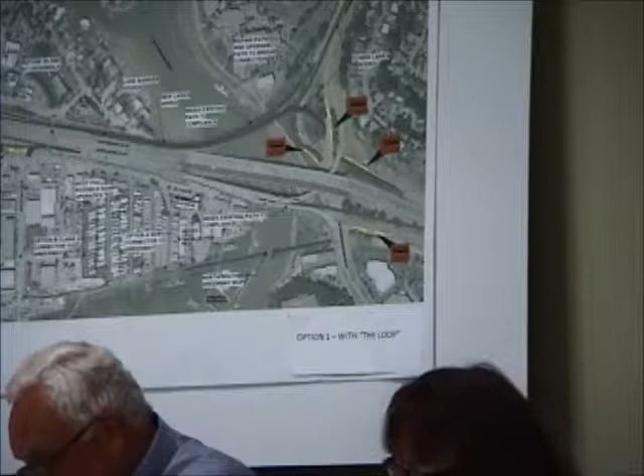Seeing none, does anyone in the public have something to add to this that they feel would be helpful? Seeing none, we're moving on.

We're moving now to agenda item 5A, presentation of newly proposed highway and local roadway improvement options from the public. I'd like to frame this meeting a little bit for all of us, because presenting a freeway project in 7 minutes is quite a daunting process, and understanding 7 of them is even more challenging.

So our job today is to identify any feasible alternatives to the current proposed project. The working group will be considering how the project relates to a problem set we all agreed on earlier in this process. That included cost, delay, design flaws, problems identified specifically in the set, environmental impacts, and whether we have to acquire other people's property in order to build the project.

Having done this, the working group will provide direction to staff to take any of the feasible alternatives, or any elements of them, that need further study, and to work with the submitters to further define the work, develop a cost analysis of any further work, how much it'll cost to engineer it, and have something understandable and presentable and feasible, then develop a budget request to take to the full TAM board and request funding for further studies.

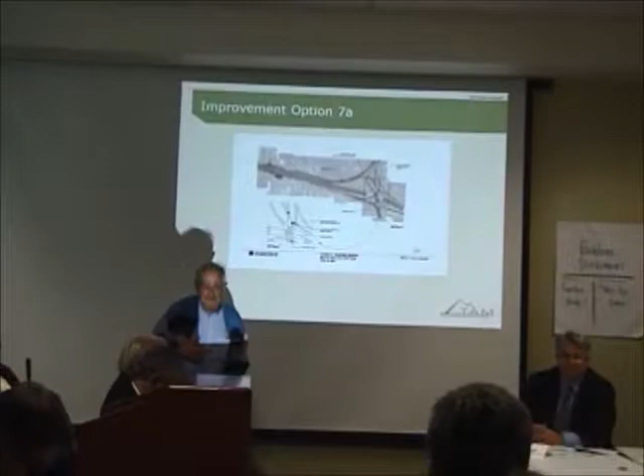Okay, so Mr. Jackowitz, thank you so much, we'll get started with you. Where is the microphone? I guess we don't have a mic. I said I was going to be grabbing the mic, it was so great, but I don't have a mic to grab. So if you could just project out this direction, that's probably a good place to stand, honestly.

My name is Thomas Jackowitz, and I've been commuting from East Bay for the last 25 years. I'm forced each time I leave Richmond Bridge onto a surface road to connect to 101. In the evening, going home, I'm again forced onto a surface road to Sir Francis Drake Boulevard, another one, to cross over to 580 and get to the Richmond Bridge. So I am the problem. I really represent the problem, and I've represented it for the last 25 years.

There shouldn't be a problem, and wouldn't be, if you followed the Caltrans recommendation. Caltrans wanted to connect 580 and 101 25 years ago in San Rafael - freeway to freeway, it makes sense. Once you do that, all the pressure on Sir Francis Drake Boulevard and the surface roads will be much lessened. It won't be resolved, but it will be lessened. Anything before that is really just a patching job, in my opinion.

That is my proposal: direct your attention to a 580-101 interconnection in San Rafael. That's number one. I'm requesting, as an individual, that Caltrans produce all those plans they had 25 years ago. They were forced to bury it for political reasons, no other. Get this into the program, because if you don't do it today, you'll be forced to do it maybe 25 years from now. You can't avoid it - the geography of that location begs for the connection. That's my proposal, number one.

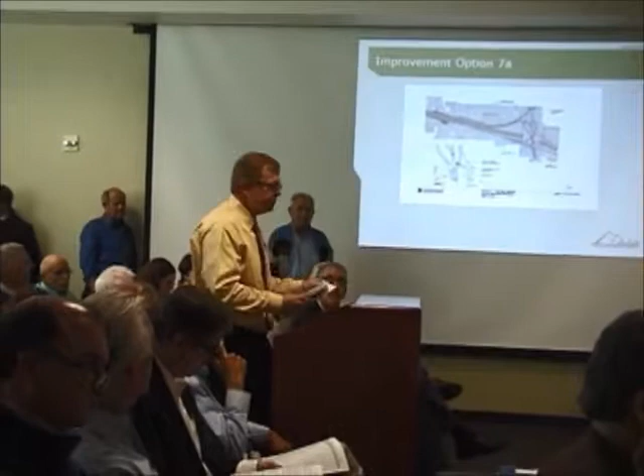Thank you, working group members. Bill Whitney, I'm the project manager for the Greenbrae Corridor Improvement Project. I'd like to tell you a little about the process we've gone through to provide an initial assessment of the options. TAM staff, for your direction, has looked at all these options and prepared an initial assessment. We worked with our technical team of traffic engineers, civil engineers, and highway engineers to further refine this initial assessment. Then we had a meeting with Caltrans, a well-attended workshop, where we went through the options and further refined our initial assessment.

I'd like to say that when you propose to modify something, just like your house, if you're going to build or remodel, you have to bring it up to current standards. So that's what we're faced with all of these options, as well as the option that we proposed - when you're improving it, you have to bring it to current modern standards.

I'd like to address a couple of the options Mr. Jackowitz presented. The first one was his freeway-to-freeway connector in San Rafael. We have looked at that in the past. The working group actually had a presentation on one of the movements of that freeway-to-freeway interchange, and we felt it had benefit - it does provide a direct freeway-to-freeway connector.

What we found with our previous investigation is that westbound 580, coming from the Richmond Bridge going southbound on Highway 101, we learned there was a number of traffic issues that caused congestion and potential backup of Highway 101 in the southbound direction in the morning. We did look at the other movement, the northbound 101 to eastbound movement, and we feel there are benefits to that.

A couple of challenges we noted with that proposal is that it creates two merges on the Sir Francis Drake ramp, followed by a weave between the Sir Francis Drake on-ramp and Fifer, and then a merge onto the highway in a very short distance. I mentioned that as a challenge - that is something that would absolutely need to be evaluated further.

With that, I'd like to open it to questions that you may have. Okay, so questions for either Mr. Jackowitz or staff on this proposal. Go ahead.

On the northbound 101 to eastbound 580 concept, does that also impact the public right-of-way and impact private properties? We think it does, yes. Could you describe where that route would be located? Well, as you're going up and over Cal Park Hill on 101 and coming down, the businesses to your right, to the east of Highway 101 - there's a number of businesses in that loop, and they would be affected by the development of such a proposal.

I noticed that in the supplemental information we got this afternoon, it states that the US 101 southbound connector has previously been investigated and discussed by the working group. I don't believe it's been investigated by the working group, and any discussion was cursory at best. So I just wanted to clarify that, and if this turns out to be something the working group wants to pursue, I want the record to state that we have not previously discussed that.

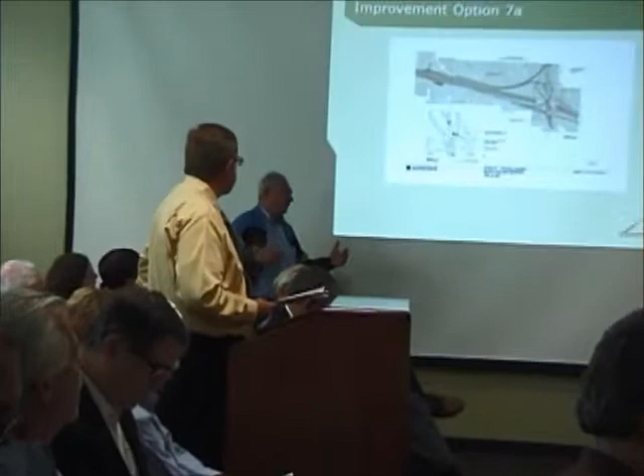So maybe it'd be better to think about this particular structure in the context of the Marin Deserves Better structure, which gives a different context and a different solution, and just move on from this particular option. That should belong in their proposal, I think, yes. I just want to emphasize the need for the surface-to-surface crossing.

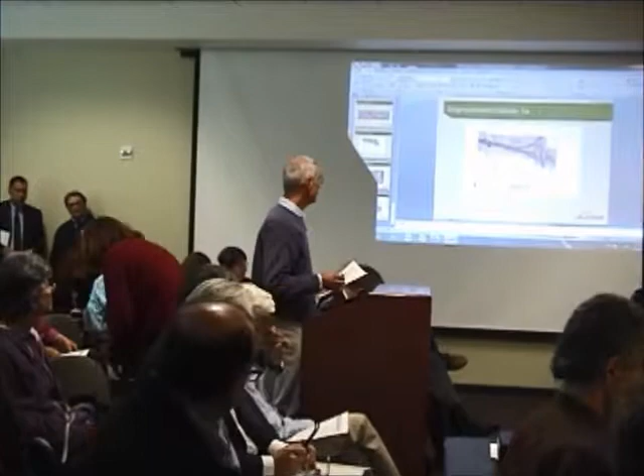The first proposal is a 3-way undercrossing at Fifer Avenue interchange instead of at Wornum. Now, how would you do that?

Well, most of you probably know that Wornum undercrossing is actually on a hill, about 30 feet high. So basically what we do is instead of dropping down here, we just extend that hill by keeping it freeway elevated until it gets across over here, and then let it drop down.

Now we can extend Fifer. This is Fifer, by the way. Lucky's is over here. But we can extend Fifer and just under here so we can access these ramps. We can access Redwood Highway, all this area over here.

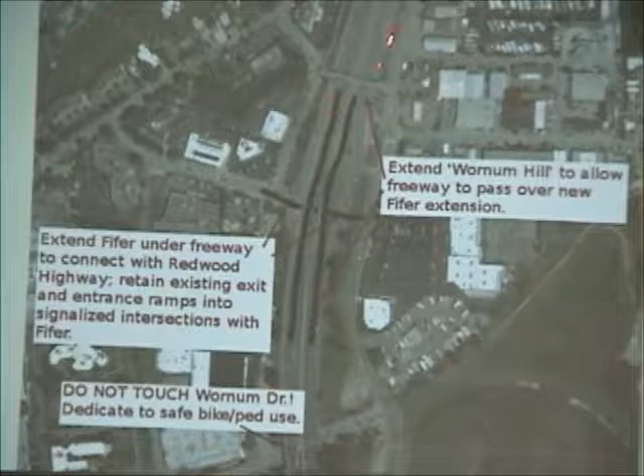Now, exactly how the traffic gets from up here down here, and so on, this proposal does not address. You will hear more about that in my second proposal, so I'm not going to address that right now. There are a couple of problems here, though, that I do want to indicate.

This exit coming off down to industrial, the so-called industrial exit, if it hits Fifer here, and then you want to go over to Redwood right here, that's a very short area, and probably would have trouble stacking traffic.

So lots of possibilities to address that, and one of those is Fifer comes up here, takes a left, goes up to the present exit where it intersects with Redwood Highway. You can stack up traffic there. Another problem with this is that bringing this exit down here to intersect with Fifer, you've got Nellen over here, about an arm's length away.

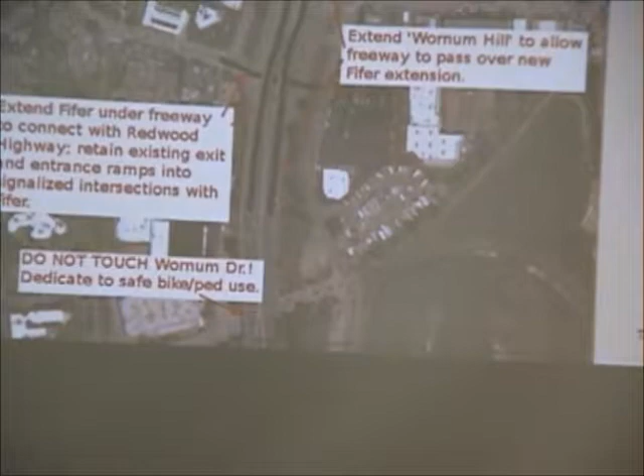That's a mess. A possibility of dealing with that is to stop this off-ramp, bring it over here to Nellen, and that's where you access Fifer from there. Now, why would you want to do this? I see there are three constituencies. The first is a regional constituency—Southern Marin, Central Marin. I can make a case that it's actually much broader, even worldwide. But what I really want to do is save Wornum Drive.

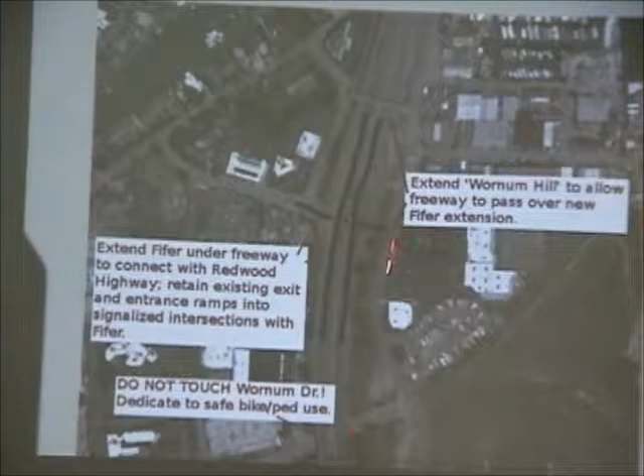The second constituency I see is the whole community of Larkspur, Corte Madera, some other unincorporated areas, the boardwalk, and so on. These people really have a lot of trouble with the congestion down here on Bella Vista and Redwood. What this undercrossing would do is take all these offices and Redwood High School and all these people who want to go north—they just go underneath here, take a left, and they're gone. Instead of going down Bella Vista, taking a left on Wornum, taking a left on Redwood, coming back up here—what I call the Wornum Dipsy Doodle.

Same thing if people want to go the other way. You've got the same kind of problem if you're over here and want to go south. You've got to go all the way down here and come back here and then on here, instead of just coming here, going over here, and boom. It seems to be a fairly straightforward kind of thing.

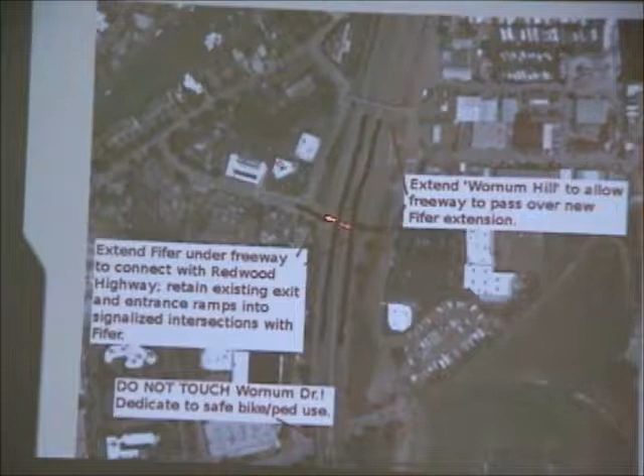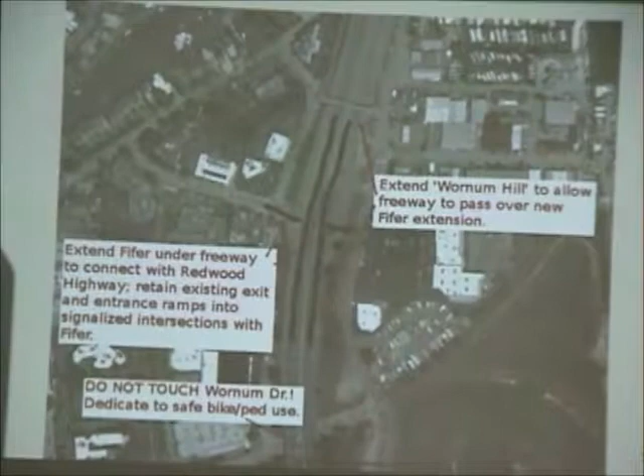And the third constituency is the immediate Fifer industrial neighborhood. It's primarily commercial now—there are some residences on the creek, the boardwalk, the mobile homes, and possibly in the future there may be other residences. But primarily commercial. Now, with this, you're right on the freeway, you've got immediate access to it, and you get to the other side, even to services that you want to get to on the other side, right there.

And Mr. Price, you're over 10 minutes. Can you wrap up soon? I am over 10 minutes. He's only got 5 minutes. Oh, I'm sorry, I can't count—this is down counting. Could you excuse me? Okay, that's good. No, that's okay.

Thank you. And one of those other little things—you put a bus pad here, you know, you get one to the other, it's at grade. It's a nice little feature.

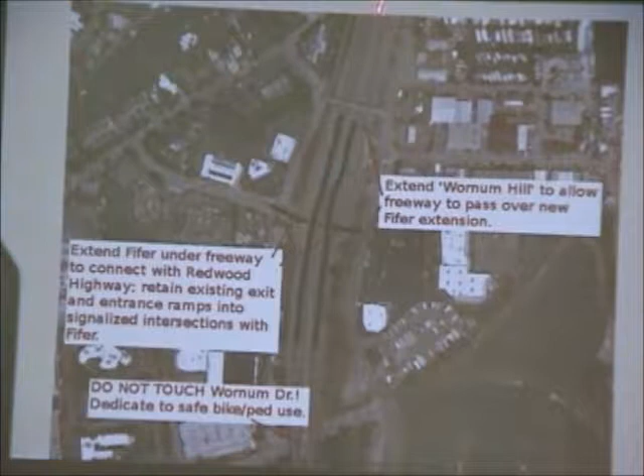As far as noise is concerned, unless you want to repeal the laws of physics, there won't be more noise. It may change a little bit about where it goes, but overall it seems to be somewhat imperceptible. Anytime you do any freeway work in a developed place like this, you've got to put up sound walls. That's it. This proposal also has another option: keep that freeway elevated until it gets up to the creek. Now I can see the eyes rolling and the noise is crazy.

Well, we're going to have to do that sometime in the next 20 years anyway, or we're going to be underwater. But it also changes the whole dynamic of that whole area, because people are going to go up there and look through, and see all the places you can angle across here or there. You don't have to have just one way to do that. People say, oh, there's this big hulking structure.

Well, let me ask you a question. When you first came into this room, you noticed there's a wall there, you probably recognized there's a door there. But I bet not one of you knew there were fluorescent lights in that pattern right there. So that's the same thing that would happen here.

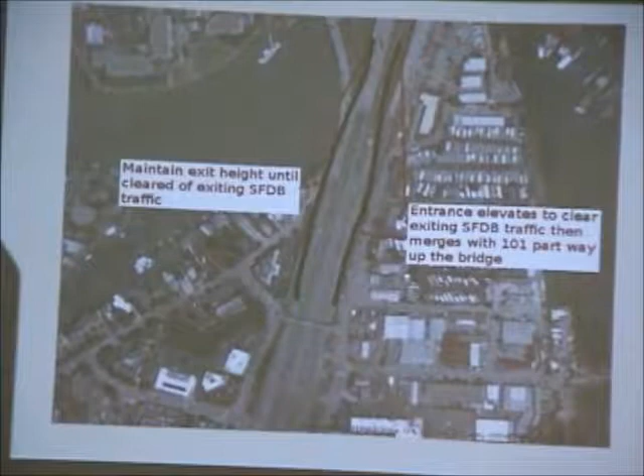Consider downtown San Rafael, what it would be like without that freeway elevated. If you're down there on 4th Street, take a stroll underneath that freeway, stop and look up. You will see sky. How many of you knew that? If you did, it's probably because of that accident a few months ago.

Okay, a second proposal. Independently, it's just another way of getting from the Redwood Highway area to merge with 101, and from 101 back on Fifer. Basically, you get on, elevate, you fly over these guys and merge here.

I was going to say something about how difficult all this is going to be. I sincerely recognize just how difficult this is all going to be—physically, financially, and politically—but all that good. Thank you.

I can vouch for Mr. Price. Every time I'm down in the corridor, I see him and Nancy riding through, so they do know the corridor very well. Like all of our proposals today, we have elements that absolutely have beneficial features.

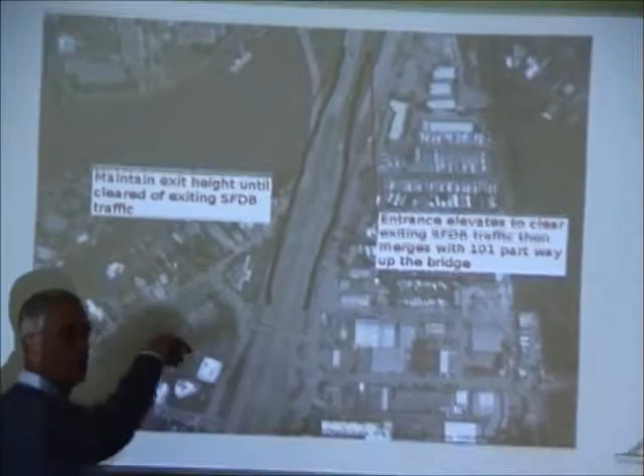Can we ask him to just go to his illustration and point out the flyover? That'd really be helpful. It's a braided ramp—well, no, there's only one. Point to it, sir. Okay, going northbound, here, you go up and over these guys that are trying to get off over here, and then you come back in and merge up there with the freeway.

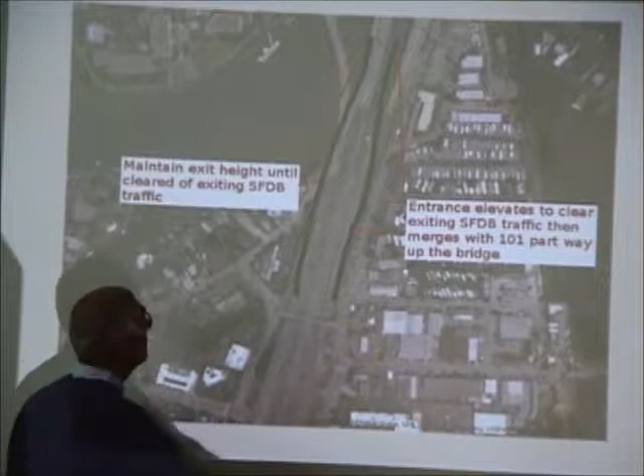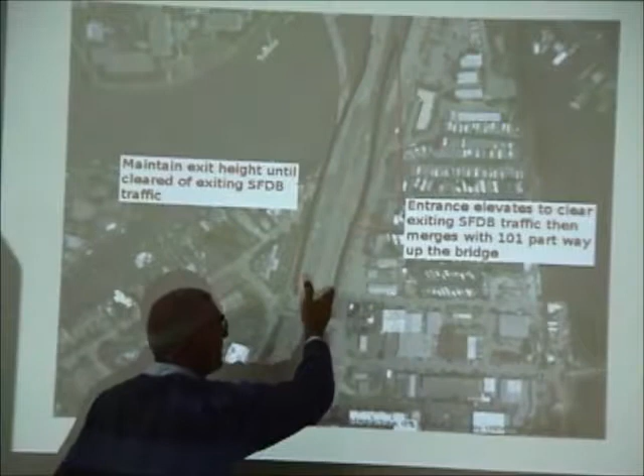Coming southbound, you come down here, partway down that bridge, you stay at that level, so you cross over here, and then drop down, and you come back right down to where you are now. So these exiting folks do not interact with any of these people coming down through here. And same here, these folks going up there do not interact with the people trying to get off going that way, because they're all above it.

Above it, and that's all on an elevated structure. Well, yes, it elevates. Okay, that's correct.

Katie? I was trying to clarify if it would reduce, have an impact, or relieve congestion on east and west Sir Francis Drake going underneath the freeway, and I'm still not clear if that northbound traffic that now gets on going north at Industrial and has to drop down and cross the freeway, is that going to continue, or would they be jumping onto the freeway?

That's what this does. It takes that traffic that now has to stop at Francis Drake and then go back on. It takes that traffic up here, goes up and over this freeway. So they're coming and getting on at Pfeiffer on the east side of the freeway? Somewhere along here. I'm not sure exactly where, but somewhere in here.

And then, with regards to the height of the structure, and not to be disrespectful, but given the community's real pushback and outcry not to have the elevated structure that was part of the build project, how does what you're proposing compare height-wise and location-wise to that structure? The height of these things, I would estimate to be about the same height as this.

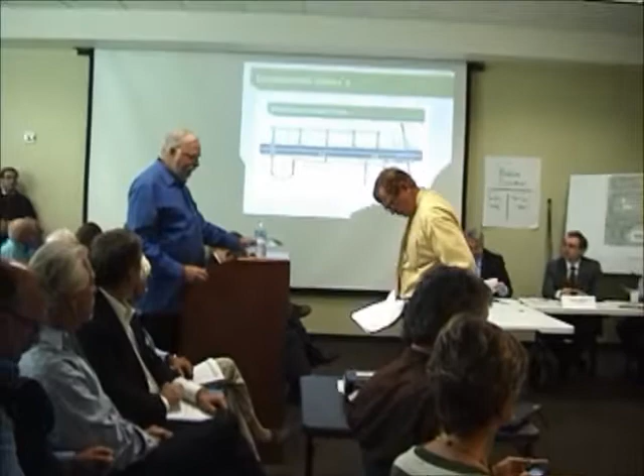Okay, what I'm about to describe here is not complicated, but it is a different approach to typical transportation problem solving. The Greenbrae project is a stunning example of how the standard transportation engineering approach didn't work. So here's another way of looking at things. Rather than throwing money at an expensive structural solution, why not take a surgical approach and try to understand exactly what the problem is first before spending big money?

Then a least cost solution can be created. Let's start with what is the problem? Robert Harrison identified two of the big problems in his proposal: the southbound weaving causing congestion near Pfeiffer, and northbound congestion around the Industrial Way on-ramp.

5 of the 7 proposals here today call for a new road or structure to solve the Pfeiffer problem. 2 call for a new bridge for northbound 101 on-ramp traffic. 1 calls for a new bridge for local Sir Francis Drake traffic, and another calls for modifications to the existing ramp. My approach is different in that it starts by questioning the assumptions.

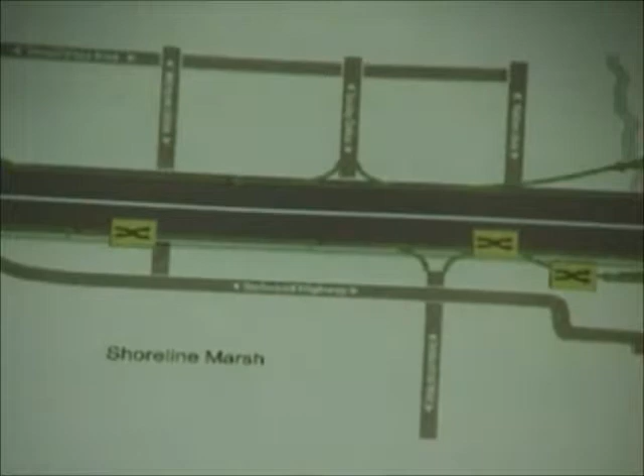So the question is, what would actually happen to traffic? Would the world as we know it come to an end, or would people adjust? It's an open question, at least in my mind.

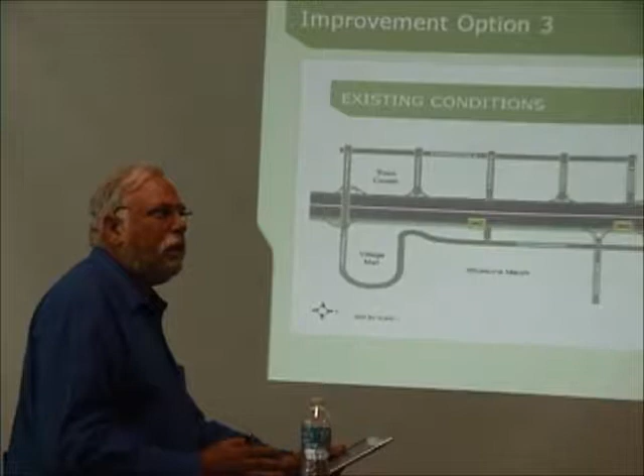Because modeling is apparently not trusted, why not try out a closure for a test period, say 2-3 months? With enough advanced publicity and public information, drivers would adapt to the new realities. We get messages about Doyle Drive, the Presidio Parkway closures.

That kind of thing could be done. We think drivers would adapt to the new realities. We would then see what happens. By making measurements before and after, something useful should be learned that will allow a decision to be made on the basis of real-world experience and not theory or hypothesis.

So the first assumption being tested is that a ramp that has been in existence for roughly a half century or so is vital to the functioning of a commercial district. We know that such a ramp could not be built today due to design guidelines that Caltrans has developed through painful experience over that half century.

How would traffic flow be designed if this were a new development? What exists here today could never be built today. And so maybe there's something we can learn from that.

Another assumption being tested is that another ramp, this on-ramp here at Industrial Drive, Industrial Way, that is vital to the functioning of the East Side Commercial District.

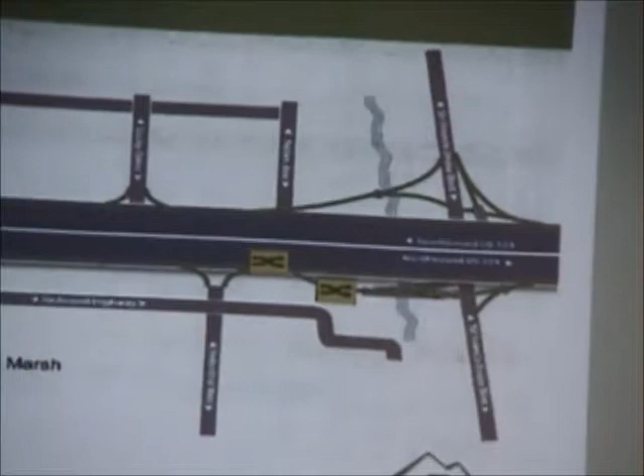We know that the traffic on Sir Francis Drake at northbound 101 — that's over here, wait, no, it's right here — that this traffic is severely impeded because of this traffic that crosses to go on to 101 North.

If that traffic didn't exist, the Sir Francis Drake traffic problems might disappear. So the other part of the test is to temporarily close the on-ramp at Industrial Way. Eliminating the cross traffic would increase the capacity for through traffic on Sir Francis Drake and might seriously improve the level of service there.

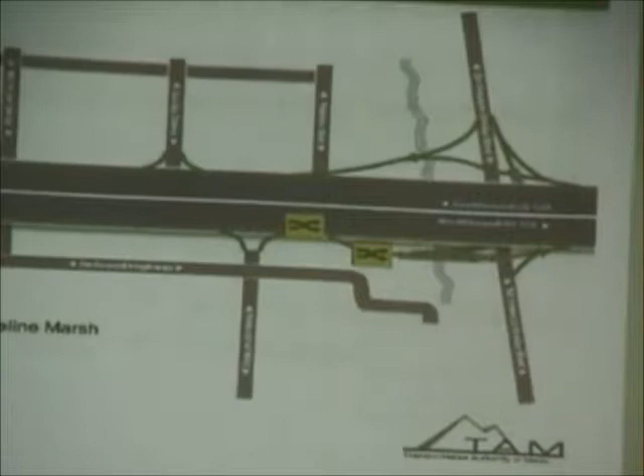The staff report raises fears of liability unless everything is done like it always is, with modeling and studies and consultants galore. The rest of the world is moving in another, more experimental direction.

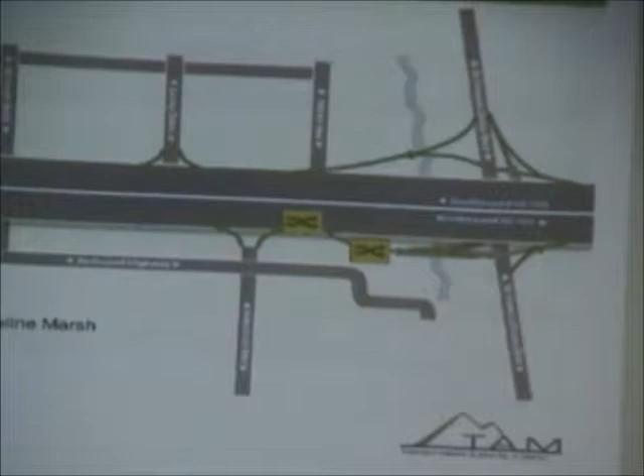Both New York City and San Francisco have conducted tests of innovative new ideas. My understanding is that they just did it to see what would happen if they didn't go through those procedures. So that's my first proposal.

What I'm going to say now does not relate to this slide. A second set of proposals is aimed at identifying the major traffic generators and seeing if it is possible to attract enough drivers to use transit and van pooling that congestion is mitigated. There are three target areas.

The first is down Sir Francis Drake, namely Marin General Hospital, Marin Catholic, and College of Marin. And there may be other major employers out that way, but those are the three that came to my mind. We're proposing studying all the cars that go there and see where they came from.

And that it might be possible to move them onto transit. The Larkspur Ferry attracts many drivers to its parking lots, and they're looking to increase service, which would attract even more traffic. So figuring out if shuttle buses could make a significant difference there, particularly under the condition where there's paid parking, so that there's an incentive to use the shuttles, is a question that really needs research.

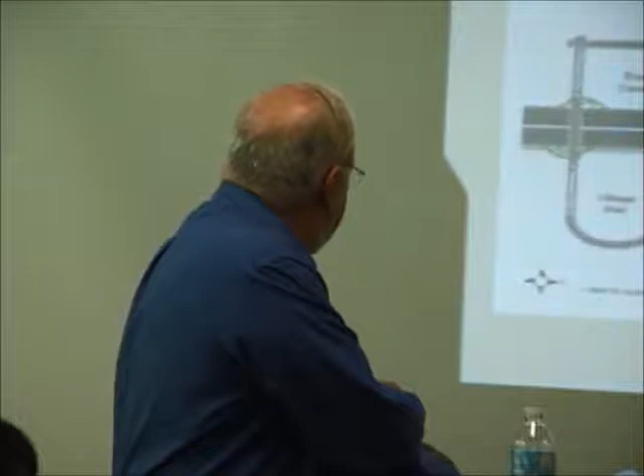And finally, I strongly suspect that the traffic congestion northbound in the afternoon is caused by vast amounts of traffic entering the freeway here at Tamalpais. That seems to be what brings the whole freeway down to a standstill. And so the question needs to be asked, are these employees of the shopping centers?

A careful study of these traffic generators could determine that better transit could accomplish much, especially once SMART is running. Making Sir Francis Drake work better could merit Regional Measure 2 funding because it would improve access to the Richmond Bridge. I would add that the staff evaluation minimizes the potential benefits of transit.

My response is that highway engineers and transit planners often see the potential for transit differently. That's just how that goes.

A further analysis that I call for in this section would evaluate a recent study that claims that the millennial generation is driving less and that the nation as a whole is driving less since 2004. TAM needs to know if it is planning for way more growth than would be likely to occur. The paper I'm referring to suggests not using current travel growth assumptions and being conservative in building capacity for the future.

Makes a lot of sense to me.

Finally, I noticed what looked like an inexplicable slowing down of traffic going onto the Richmond Bridge. It gave me an idea for one last very cheap proposal. If there were a flashing message sign right after the Sir Francis Drake merge onto 580, roughly in the area where the off-ramp to San Quentin is, and the flashing message said 'Resume speed,' that might remind people that they have an accelerator and that they could actually go the speed limit.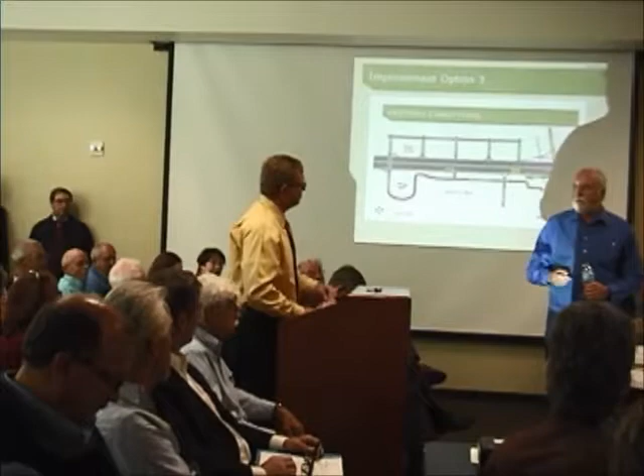Thank you, David. My apologies to Mr. Schomburg for the graphic mistake. Didn't hurt. Okay, you described it well.

A number of the elements that we have viewed as part of our initial assessment as beneficial features include that with this temporary test, we are reducing the number of ramps between Sir Francis Drake and Tamalpais. This does eliminate the weaving issues both southbound and northbound.

Some of the challenges we observed were that by doing so, you would be adding more traffic to some of the other ramps, such as the Sir Francis Drake off-ramp, Madera on and off-ramp, the southbound Tamalpais off-ramp, and the northbound Tamalpais on-ramp. You would potentially be increasing traffic on local streets, such as Tamal Vista Boulevard, Old Redwood Highway, and Tamalpais Drive. We did observe that in the industrial ramp closure, you would be creating an isolated on and off ramp.

This increases the chance for dangerous wrong-way movements onto the freeway. Closing of on and off ramps without an extensive analysis of highway and local road impacts with suitable modifications may cause safety concerns and unacceptable liability. Modifications to address impacts should be considered and implemented as part of any proposed temporary or permanent ramp closures.

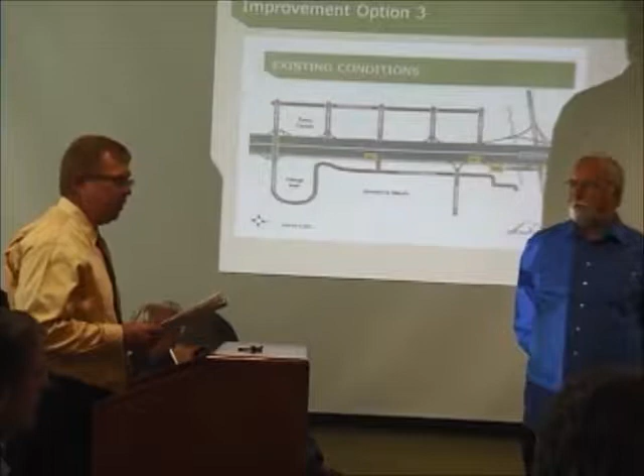We also believe that Caltrans would absolutely need to approve these closures and that they would likely require resolutions of local support.

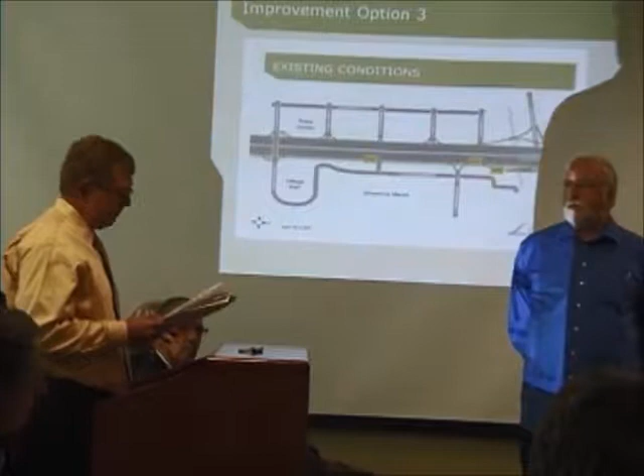As far as TDM, we support transportation demand management by all means. TDM measures may reduce traffic on the roadway systems, but are often difficult to demonstrate the benefits. As far as the San Rafael Richmond Bridge corridor, we do believe the addition of temporary signage may be beneficial to congestion for the eastbound Sir Francis Drake merge to I-580. However, modeling of driver behavior in these cases may be difficult. It would cost more to model it than to test it.

Okay, so let's open it up to members, questions for Mr. Schomburg or staff, or any insights that you have on the proposal. I'll start over here, Brad, and then Gary, and then Carla.

I just had a really quick question for staff, and maybe I missed it, but what were your thoughts on the K-rail barrier? I know that's common in a lot of the proposals. Do you know what I'm speaking of? The barrier that disallows the Sir Francis Drake traffic, or the 101 southbound traffic, from merging with the Sir Francis Drake on-ramp traffic until after Lucky?

That's in a number of the proposals you'll see today. You know, that is one way of controlling the traffic, attempting to merge. You are controlling it physically with the barrier. Whether it's temporary or permanent, we're going to be looking at that in a number of cases.

But he did allude to the fact—speak up, Diane, please—you're gonna ask these trips to then go to another ramp to exit. So in the morning, 600 to 700 trips per hour in the peak, trying to get to Redwood High School, are gonna either exit at Drake, or they're gonna go down and distribute at Madera or Tamalpais.

So part of what we understood is needed if you're gonna close any of these ramps is, what happens at these other ramp locations? Does traffic back up on the highway, causing a new rear-end collision problem? Does traffic then end up on Tamal Vista, Redwood, Tamalpais, which Bill mentioned? And ideally, you would know that before you went out and closed the ramp. You'd have an idea as to where the trips might go, and that's a reasonable type of analysis.

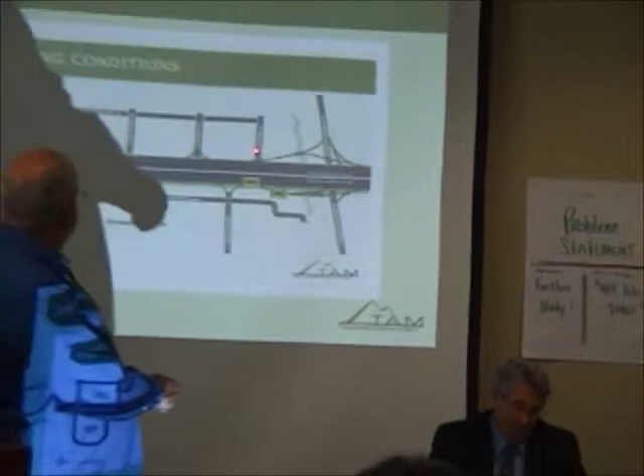Had I worked off of my actual drawing, I would have mentioned that the access to Fifer for people who are on the freeway already would be via Sir Francis Drake and then coming over the bridge, and that would require new signage, temporary. So we're gonna talk more about that later? It's common to a number of other proposals. You answered it more than Bill did, but I know it's coming up multiple times, so I want to put a little post-it in there.

Okay, Gary? Well, I must say I'm intrigued by the thoughts, and it seems to me that it's not irreversible. I'm not advocating yet, but it seems to me that it's not irreversible if we discover there are further complications through the test period, then we can take other avenues. But we're talking about $140 million, approximately. This is considerably less.

And so I've said I'm intrigued by the idea. I'm glad you brought me forth. I am curious with regard to the funding and the timing, because this would be a delay to an otherwise good project. So from a funding standpoint of staff, what does this do to the funds we currently have available?

Bill or Diane, do you want to answer the funding question?

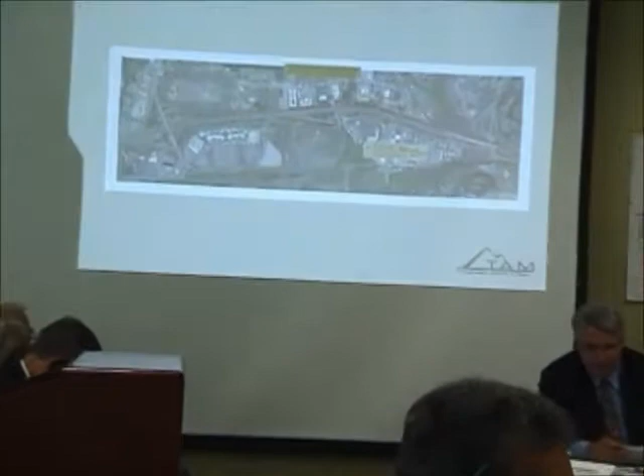Push the button, push the button. Whoa! Boy, it's small. I wish you were all at the church the other day. You saw my article in the IJ on Friday. You are welcome to an open house at the Lutheran Church, we have a high definition projector. Awesome. Too bad we don't have that.

I just handed out a little submittal form that wasn't in the packet. It says, if you want to build raised flyovers and graded ramps in the sky, consider providing a true 580-101 freeway interchange in San Rafael, and return East Francisco Boulevard to local traffic as originally intended. That would go a long way to help Corte Madera.

The only reason I mention this right up in front is all the discussions I ever got into with the Marin Deserves Better group and others always said, let's get this done freeway to freeway. It's ridiculous to be on East Sir Francis Drake Boulevard.

If you're eastbound on Sir Francis Drake and take that exit, you just stay in your lane on the right-hand side and get off at Fifer, no changing of lanes. If you're westbound on Sir Francis Drake and take that same ramp, you'll be on the left side, and that lane goes continuously all the way over to Tamalpais without changing lanes.

There's barriers here, and then in the middle of those 2 lanes that stop the traffic on 101, after it crosses the creek, to get off at Fifer, it's told to enter this off-ramp here to go to Fifer. No problem, no problem. Right here is the key to this plan.

What is this thing right here? This is an opportunity. If we don't grab it right now, set up a regional bus express bus mini transit center. So buses from Vallejo, Santa Rosa, Petaluma, all points north, can put people in a bus, express bus, get 20 cars off the road at once, that's minimal. It can come down, come off the freeway and enter this transit center.

Of course, from here to here we only have off ramps, and express buses get off there. Waiting for them are shuttle buses that can load from Fifer and turn on and enter the mini transit center.

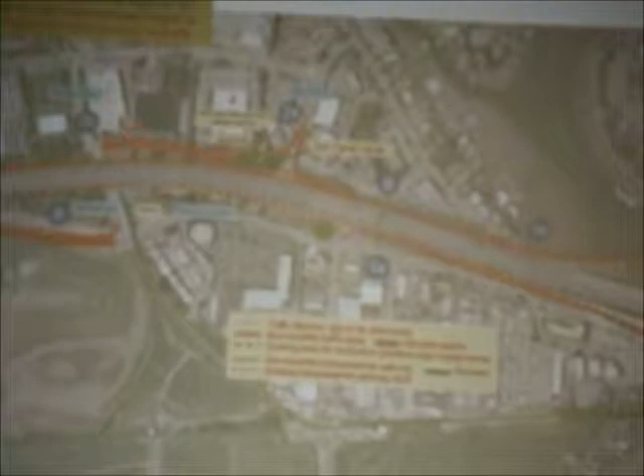Anybody wanting to go southbound, one of the projects, part of this project - these are all individual components - there is an on-ramp from Wornum southbound. Oh my gosh, keep in mind that Wornum is halfway between Sir Francis Drake and Tamalpais. It is the perfect place to focus on access.

You are transferring from one side of the freeway to the other, and if you're on the east side and want to go south, you'd have to cross under the freeway, you go to Wornum, you take a left. You do not have to go up and around and get back to Fifer and get on. I don't care what you build, ramps or otherwise, any plan, you have to take that traffic off that circle.

The same thing applies here. There is another ramp, there are difficulties here, you have to mitigate them somehow. But there is now a northbound on-ramp from Wornum, right there, without stopping - it's a yield on the turn and goes north and forms its own auxiliary lane.

That auxiliary lane going over the top of Wornum is a fifth lane. Does it exist now? Does it exist now? The fifth lane there - yes. We got one guy who knows. Now that's going north - do we have a fifth lane going south?

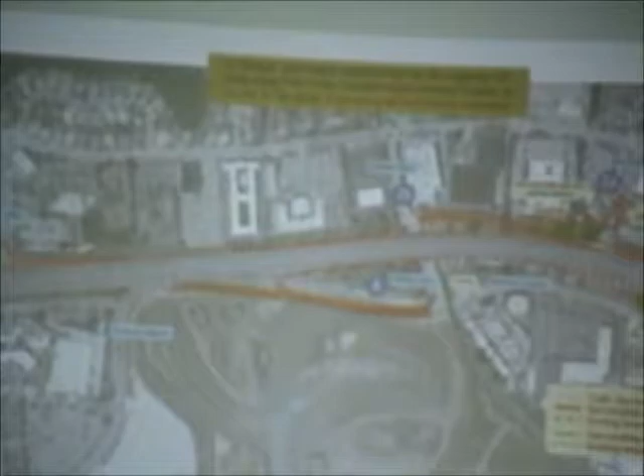To allow for this auxiliary lane, it starts right there and without moving at all, without changing lanes, goes all the way to Tamalpais. Do we have the capability at the Wornum overcrossing southbound? No, we don't. We need to build that lane, that extra lane over the top of Wornum.

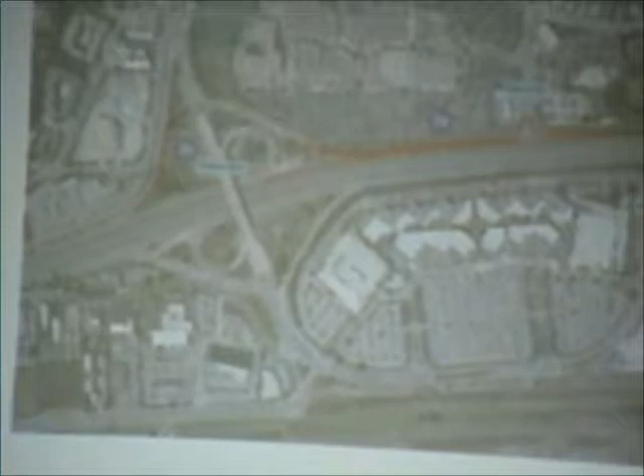With that, we have a continuous auxiliary lane. Here, there could be a sixth lane, and when you get on at Madera, instead of merging into the auxiliary lane, you have your own separate lane. You just stay in that lane that merges to the middle lane, and you can get on a new on-ramp there. That's only needed if they won't let you merge over to the auxiliary lane from that on-ramp. Beautiful.

And of course, keep in mind that this bridge for the north-south Greenway - you'll notice there's some details and pilings in there. We should have an international design competition for that span. We can get $10 million worth of design engineering for a fraction of that. Plus, it's going to be fascinating to see what the world can come up with. Prize money, of course, for what you pay is unbelievable.

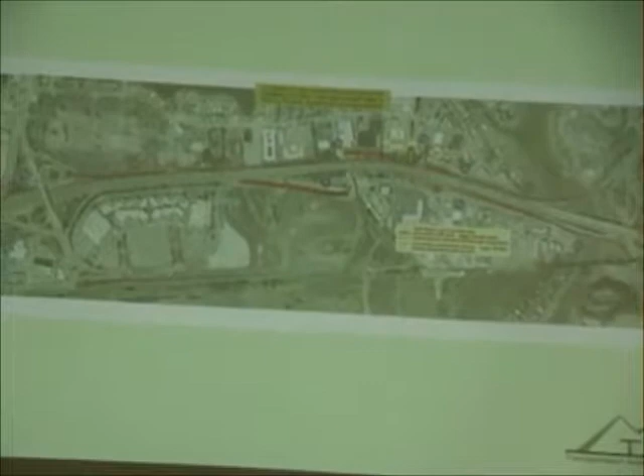And of course, the coup de grace - what's right there? What's right there? That's right. What's my project? Is there a project there? It's a no build. It's right there. Don't turn it down. Okay.

Basically, that's it. Transit oriented. And what we need is new direction.

I have watched this. This plan has existed for over 4 years. Do you think they responded? No.

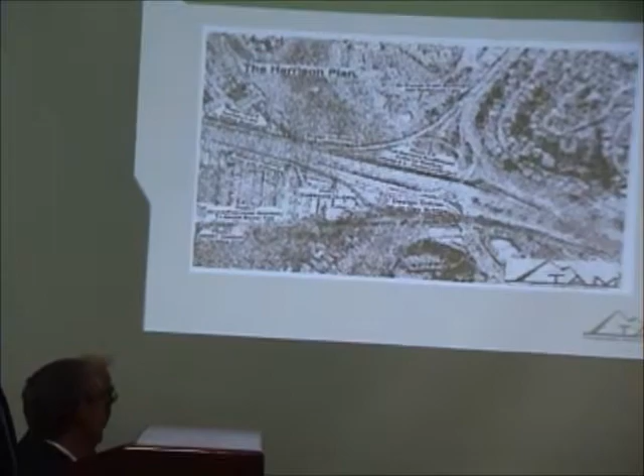So now in terms of the projects themselves, my main project—unfortunately it's virtually impossible to read, but hopefully some of you can see it on your handout—is a single bridge, northbound, over Corte Madera Creek and Sir Francis Drake, to take the northbound ramp from Redwood Highway to the freeway. In other words, we're going to eliminate that northbound bottleneck by bypassing it with a new ramp.

But on that bridge, we're also going to have the bicycle greenway extended south and the potential for the SMART train to be extended south. Moving the SMART train onto that roadbed means you can move it from where it's now being looked at, up behind the movie house at Larkspur Landing, a remote location, down to East Sir Francis Drake. So you put the SMART station at East Sir Francis Drake, meet the local buses, build bus stops with shelters, and make a major transit center at that location. You're not just adding the potential for a SMART extension, but also putting in that transit connection.

So we've got the multi-use bridge. I'm calling it design-driven, meaning it's more than just a slab up on piers. Hopefully we get something serious, where it becomes an architectural feature of Marin County. Maybe even the entrance to Marin County from the East Bay is remembered because of this bridge. Who knows? We might really do something good there.

Three modes on the bridge. And the one other thing the single bridge does, it avoids what was spoken to me earlier tonight: bridge clutter. If we don't have one bridge, we'll have three bridges lined up, boom, boom, boom, assuming we extend SMART someday. Now why would we want to plan to have three bridges on East Sir Francis Drake within 100 feet of one another? Clearly a better design of some kind—maybe not what I've got, but something like that—gets rid of those three bridges. Go with the single bridge.

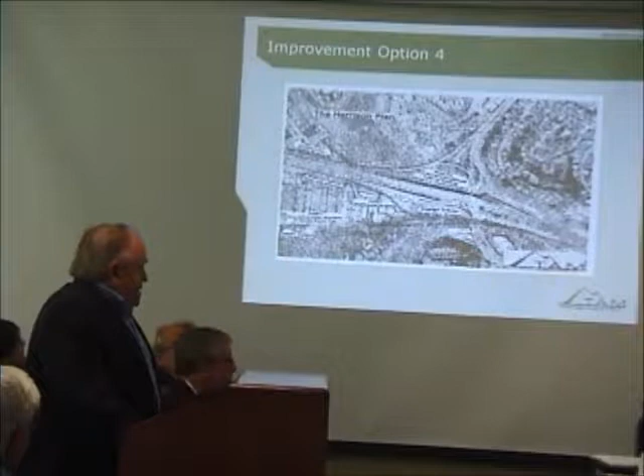Now what that does is eliminate the weaving from the freeway onto Fifer. People exit north of the creek to get to the Fifer off-ramp, and join the Sir Francis Drake on-ramp to get to that Fifer off-ramp. Any weaving then is done on a local street at slower speed, and in fact I believe you can get 1,000 feet between the noses of those two ramps, which is actually the standard for local street weaving situations. So you eliminate the weaving from the freeway, which has been identified as the key southbound congestion point.

In addition, as I mentioned, you finish the connection to the Sandra Marker Trail, grade separated, and now we've got the SMART train. The train—we have a bridge across the creek in phase 1, and we've also got the right-of-way going all the way down to Paradise Drive. Let's build the SMART train.

Let's get it down, at least down to the village, and have a serious station stop at the village shopping center. Corte Madera should become part of the SMART system. Why not? And that could be part of phase 2 as well.

The one other thing I mention in my plan is the approach to the Richmond Bridge. I suggest we just go get a 3-lane approach, stop fooling around. I don't think it can be squeezed, although there is a little bit of space out there. My guess is the structure over Main Street at San Quentin does have to be rebuilt to put the 3rd lane in. But let's get the 3rd lane in there, because we don't want that thing to back up like someone was describing earlier, all the way back to 101. So if Caltrans can't, let them restripe the whole bridge for 3 lanes eastbound.

It was there, I don't know, 20 years ago, it was striped for 3 lanes. Then we put the pipe on it, right? So we cut it down to 2 lanes. What year was that? Anybody know? 1985? It shows how long I've been here. What year was it? Round of 72. 72. That shows how long I've been around.

Okay, anyway, it was 3 lanes once. It could be 3 lanes again. Send the 3 lanes all the way to Richmond. But if not, you may not even have to do that, because if you've got a lot of space for a long merging section, that could possibly be the way to do it. But in any event, that's part of the scheme for phase 2. Also fix the approach to the Richmond Bridge.

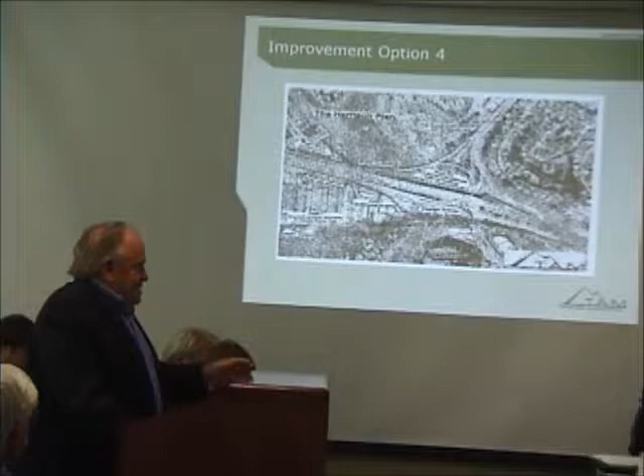Basically, here's what I'd like to say. In my phase 1, I'm claiming it can be done for 47 million. That's obviously a very rough number. I did take some unit costs off of the bridge and off of the distance on the ramps and stuff, so they're in the right ballpark. But I know we got right-of-way issues, we got utility issues, got all kinds of issues out there. It's in the right ballpark.

What I want to say is, of that money, almost half is my proposal for non-automotive: the bicycle system, the pedestrian facilities, and the smart bridge over the creek. If we're going to make a serious effort to actually get people to not take their cars, and we really want to commit to it, that's the way we got to start thinking. Maybe as much as half the money goes to non-automotive concepts. We still deal with the northbound 101, we get rid of that congestion point, but we put in some serious transit, bicycle, pedestrian facilities. Any questions?

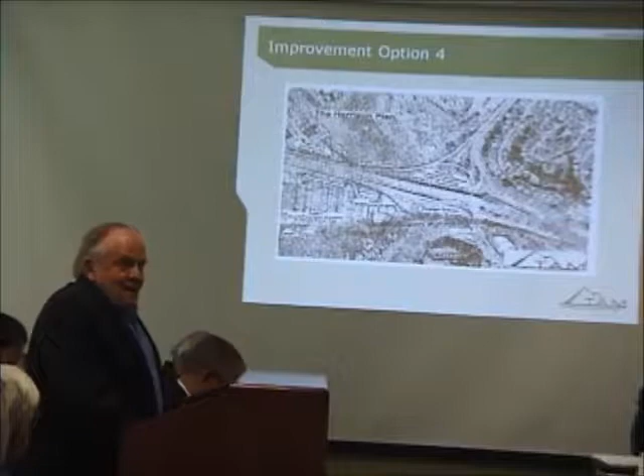Congratulate Bill and the staff. What they're trying to do here is they've got these ridiculous concepts coming from all over the place. They're only planning things, and they're trying to actually put some serious analysis on it, and it's not easy. I appreciate their effort.

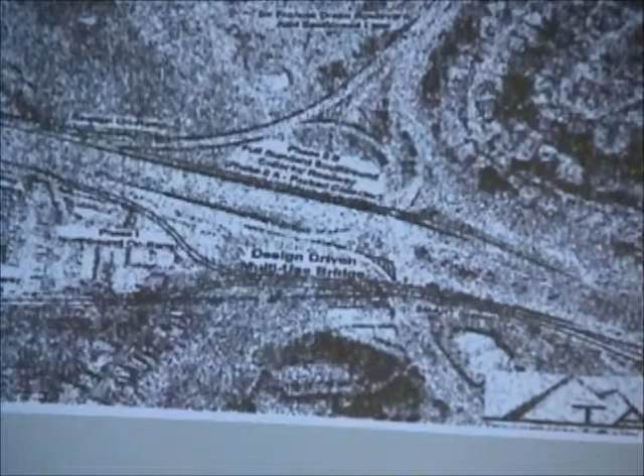Was that your question? I think it was. Well, that was my question, and I'm sure that was the answer. I don't quite get it yet.

Thank you. Okay, Brad, and then I'll come over here. I just wanted to ask about one of the, for lack of a better word, criticisms on phase 1 that's on the list here. It says likely additional traffic at Tamalpais interchange must be addressed. I'm wondering how that issue is raised.

Well, again, we interpreted some of his proposal. That was based on a previous reading. We were interpreting what's going on south of this picture, and so we read the wording of this proposal and felt like that would possibly impact Tamalpais.

I think I'd actually go the other way. I would say if anything, it improves the access to 101 North. So therefore, if anything, we might be reducing some of the 101 North traffic from Tamalpais and having them choose to come up here.

It had to do with the industrial on-ramps, and our assumption was they would close. Oh no, you mentioned now they would remain open, clarifying that was one of our questions. We didn't have a chance to. Yeah, no, no, you guys are doing a great job considering what you got to work with.

I'm absolutely impressed. If that's the case, the industrial on-ramps would close, then traffic would end up going back to Tamalpais to get on Francis Drake, right? But since there's a bridge going over under this proposal, it wouldn't have that same effect. Is that correct?

Well, I think one of our follow-up questions would be where you put the local access bridge. You've got this freeway bridge. I think we'd have to take a look at how these work together. My assumption is local access uses the existing structure.

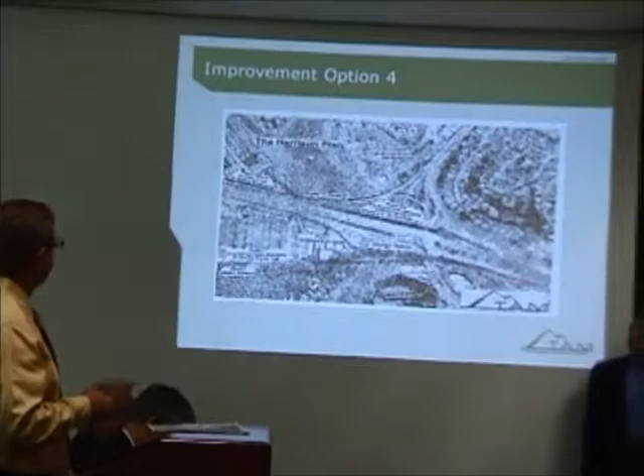Structural engineer: I would say your observation is correct. The bents do not stick out on the highway structure nearly enough to add a full lane. So you would be looking at adding columns and extending those girder beams.

Well, they do stick out on the east side though, but I don't know how easy it is to shift an entire freeway. If I had to guess, this Bill's absolutely right - on the west side, there is simply not enough to make use of it. It would be a new bridge, a new one-lane bridge.

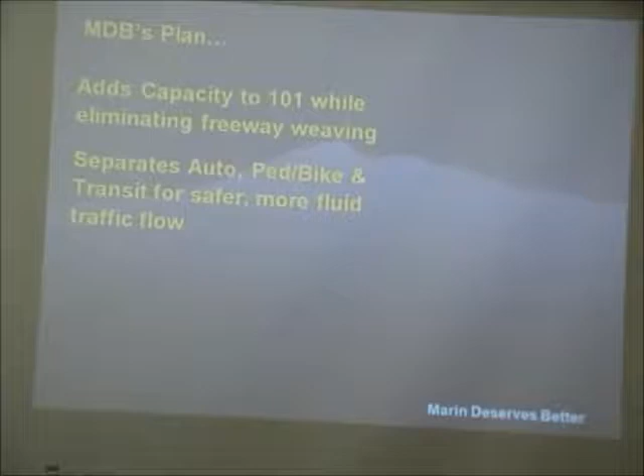The MDB plan would add capacity to 101 while eliminating freeway weaving. It would separate auto, pedestrian, bike, and transit for safer, more fluid traffic flow. And it is superior to TAM's proposal per TAM's performance evaluation criteria. Okay, now we'll show you how.

Okay, we're going to look at the traffic flows now, starting with southbound traffic. The primary benefit of our plan in this area is that it completely separates the local traffic from the freeway traffic, with minimal merges, no flyover lanes, and no need to remove the pedestrian overpass.

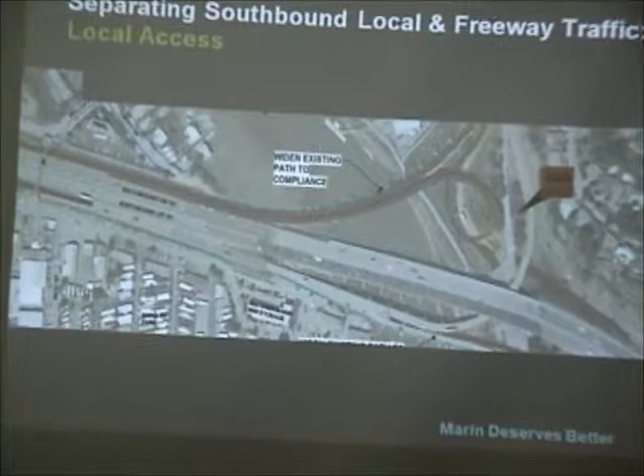We start with the traffic heading to Fifer Avenue, the Lucky Drive exit. Traffic coming from 101 South would no longer go through the awkward weave to get to the exit. They would use the exit to Sir Francis Drake East, taking a new right-hand lane down to Sir Francis Drake. Traffic lights would allow them to make a right turn, and then an immediate left turn onto the overcrossing. They would proceed over the creek and into a new right-hand lane that exits at Fifer, all the time separated from the freeway-bound traffic by rubber barrier posts.

Traffic on Sir Francis Drake West would alternately use that same route to Fifer Avenue. Traffic on Sir Francis Drake East would use the existing on-ramp, which would become the new right-hand lane headed to Fifer.

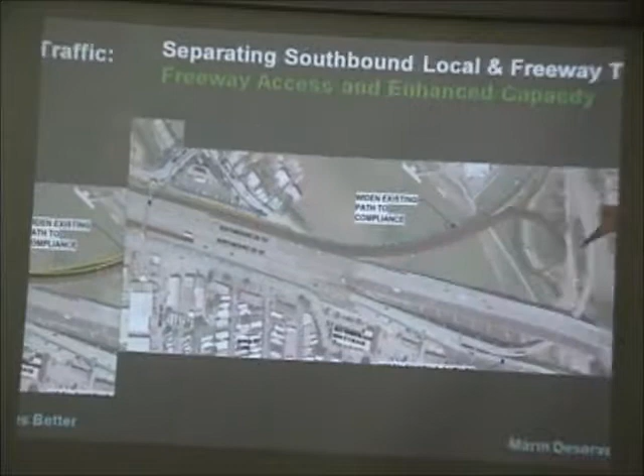Now we'll look at the southbound freeway traffic. You can see here the dotted yellow line showing the paths of the local traffic, all on the right side. Now we will bring both directions of Sir Francis Drake traffic over the creek, each in its own lane, and both on the left side of the barrier. And here's how we do that.

Traffic on Sir Francis Drake West would use the existing on-ramp to the overcross, as shown there by the green arrow. Traffic on Sir Francis Drake East would use the new loop approach road to a new on-ramp and a new left lane of the overcrossing. These two lanes both cross the creek and join 101 South.

One of them becomes a new auxiliary lane that runs all the way to Madera Boulevard, increasing the freeway capacity. And all of the lanes that cross the creek would sit on the existing structure. We'll get into that later, I'm sure. The short Fifer on-ramp would be lengthened and join the auxiliary lane.

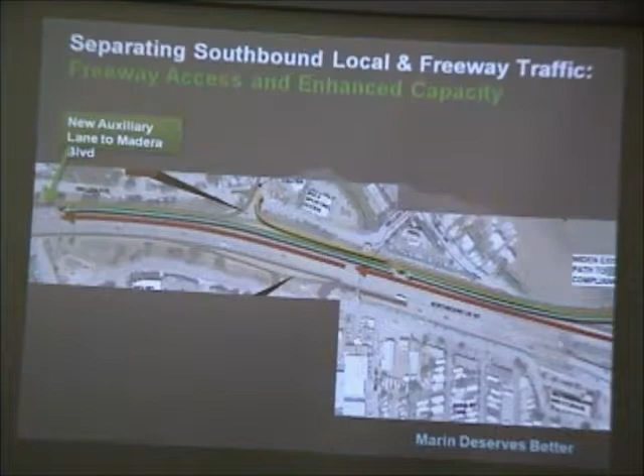Okay, now we move over to the northbound traffic. So the 2 on-ramps from Tamalpais, this one and this one, would feed into a new auxiliary lane that would extend north for the length of the corridor. So they don't merge into the 4th lane the way they do now.

At the Industrial Way on-ramp, traffic that's headed for 101 North would not descend to Sir Francis Drake and wait at the light as it does now. And there was a transition problem with the PowerPoint, so can you pick up?

Okay, yeah, I think everybody knows what happens. You come down here, you get off the freeway, you wait here, and then you take this ramp up. What they would do is they would follow that. Oh, okay, yeah, here we go. Okay, we've got it. So this is what happens now. This is very cool. Everybody waits, and eventually the light changes, and they all take off.

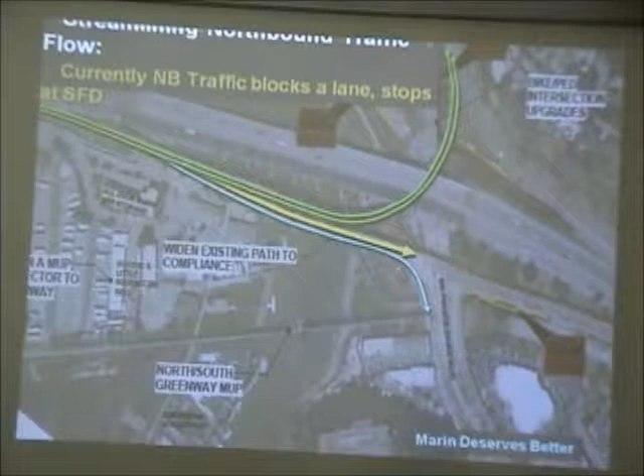Nice job. Okay, instead, they would take a new land bridge over Sir Francis Drake to 101, allowing traffic to flow more freely on Sir Francis Drake. This was misinterpreted in the review, which stated this would require a new bridge over the creek. However, it actually starts north of the creek on dry ground.

Excuse me, Mr. Carney, you have 3 minutes. Okay, thank you. All right, that's it for traffic flows. Now I'd like to introduce David McPherson, who's going to discuss the integrated pedestrian, bicycle, and transit aspects of our plan.

So on the 24th, the Marin Deserves Better group will be presenting 20 pages of the bicycle pedestrian improvements we are suggesting. Let me just hit on two of the key elements we believe are super important. The whole project area is only 2 miles by 3 miles, mostly flat, includes 7 shopping centers and commercial districts, 8 schools, 2 theaters, and a Larkspur ferry.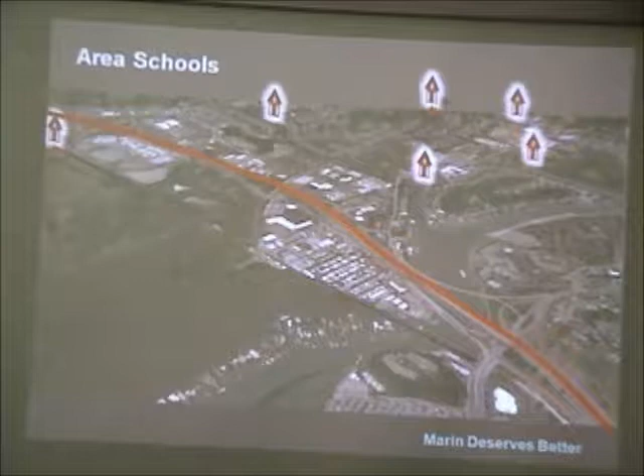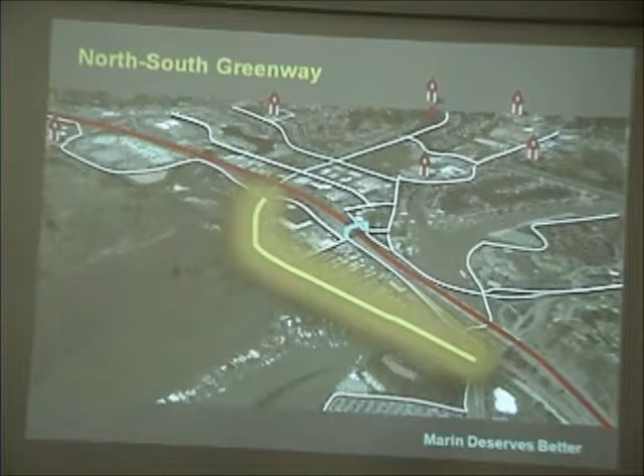This is a bicyclist pedestrian dream, but for north-south connectivity and east-west connectivity. So the two central elements would be the completion of the Central Marin Ferry Connector and the north-south Greenway, which I think shows this existing pedestrian crossing. These are improvements to existing streets, which are part of the whole connectivity. And the next slide should probably show the north-south Greenway from Wornum, crossing Corte Madera Creek and East Sir Francis Drake Boulevard, San Francisco Boulevard.

This is an essential part of the east-west connectivity: the multi-use path, being able to dip below Tamal Vista at the DMV. One misconception is that we have a completely underground tunnel. That's not what is considered. This is a short 60-foot dip below Tamal Vista, which allows all bicycles and pedestrians to avoid that intersection and the conflict, crossing underneath Wornum at grade, albeit Wornum will be widened underneath the freeway under the plan build, and our plan, and then dipping below Redwood Boulevard and connecting to the north-south Greenway.

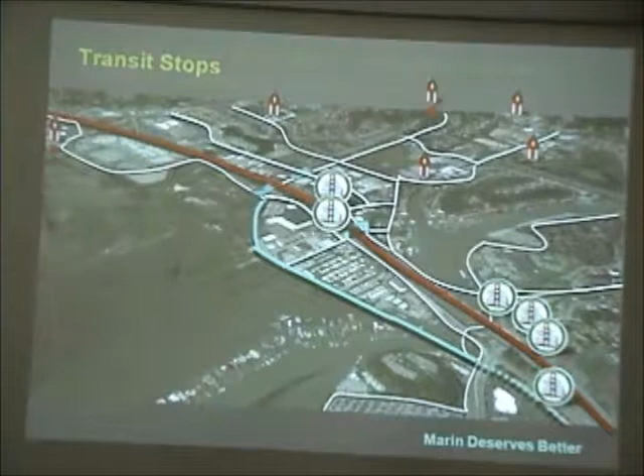I think we have one illustration that shows, this is for transit stops, but I think we have one slide that also shows an existing underpass in Davis, and these exist all over.

David, I need 30 seconds.

Okay, sorry, thank you. When you consider our proposal and compare it to the existing conditions, you'll see that our plan contains numerous substantial improvements to the flow and safety of traffic, bicycles, and pedestrians, and might save about $50 million or so. We think these benefits warrant some design flexibility given the constraints of the project area. We would be very pleased to have an opportunity to work with TAM and Caltrans to help find the very best possible solution. Thank you so much.

Some of the design features that we picked up that were challenging were that some of the proposals do not include elements that address the safety and design features that we've mentioned in a number of the other proposals.

The proposed 3-lane bridge crossing Corte Madera Creek in the southbound direction will tax the structure that we have in place today, so reconstruction of that southbound on-ramp is considered likely.

The new eastbound loop ramp assumes a curve radius that would need to be larger, and that may result in an impact to the wetlands in the area.

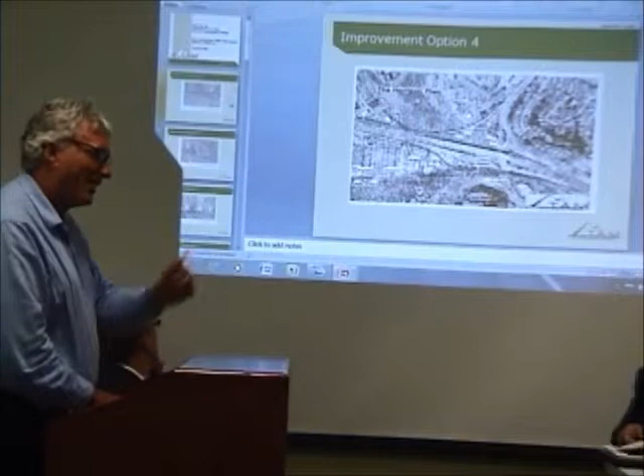And I'll start from the north, if I could get your pointer - not that I like using these pointers, they always make me feel like I have to teach you something. I'll start by saying I hope calling this the Bracken Plan doesn't sound too vain. It's meant to be anything but. It's really humbly presented to you to provide some ideas for discussion.

And it's not a plan, it's a concept rather than a plan, again, to provide ideas. It addresses the southbound improvements only, potential improvements. It focuses on traffic, however it doesn't preclude any of the ideas on the pedestrian and bicycle improvements that you've heard here.

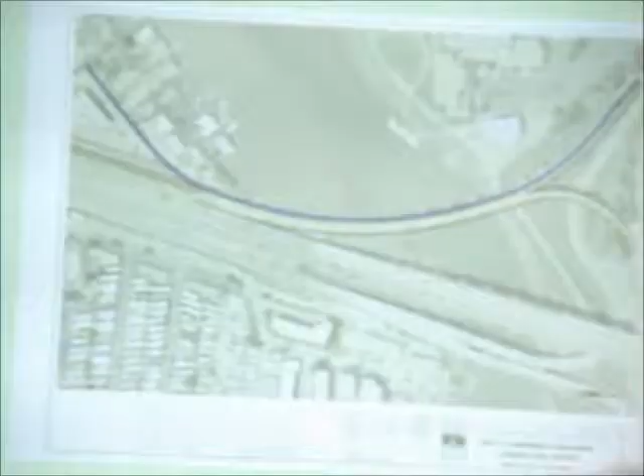And starting here - yeah, it's a little hard to see, but anyhow, just to get oriented, north is to the right. The drawings I have, which I could show anyone if you came to Town Hall, are drawn to a 1-to-40-feet scale. But starting at the north end of this, I'll just mention some key features.

We widen this, or at least restripe it. I think you could probably do this with restriping to 2 lanes here rather than 1. You have a bottleneck right here that causes congestion.

And then on a bridge across the creek, you would widen and restripe that to 3 lanes, plus the purple there, dark blue, would be a widened bike pedestrian path.

This is drawn with 3 12-foot wide lanes and a 12-foot path there. So this will limit... you also have a bottleneck here where the existing 2 lanes merge into 1.

Again, this would be 3 lanes. Now, of the 3 lanes, the number 3 lane right here would be an exit only. And if we could flip to the next screen.

So that's right here. This would be an exit only down in Nellen. And southbound traffic on the freeway wouldn't be allowed to exit there. So this would be a barrier, and that would be a barrier. So this would only be for Sir Francis Drake Boulevard to exit there.

Now, the traffic coming from Sir Francis Drake onto the freeway would have 2 lanes to merge onto the freeway.

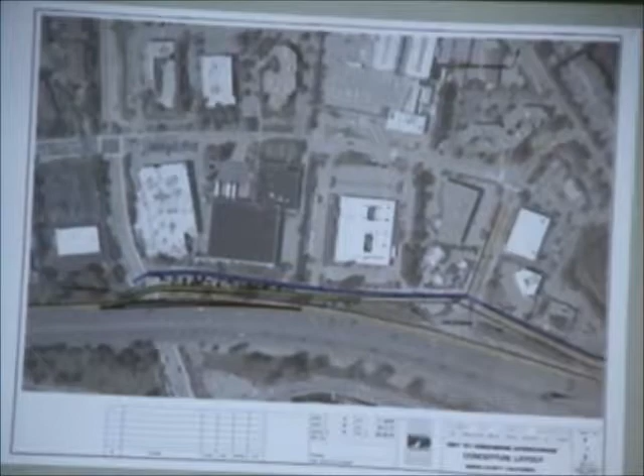I just wanted to jump ahead and mention a few of those things. Some of them I do accept. Certainly the design needs to be designed, and I recognize as much as anyone that the devil's in the details. This is a concept plan. There's structural issues that could arise.

But some of these, especially the ones that talk about the weaving, I don't think the weaving's as bad as outlined in some of these challenging features. I don't think it would impact the traffic on Sir Francis Drake. In fact, I think it would mitigate traffic on Sir Francis Drake compared to the existing conditions. And with that, one minute left, I'll turn it back. Thank you.

Okay, our initial assessment, we've identified a number of beneficial features. We acknowledge that it continues to distribute the traffic to the various ramps in the corridor. It widens the Sir Francis Drake on-ramp over the creek to 3 lanes. It provides a connection for local traffic between Sir Francis Drake and Nellen, which would allow access to Redwood Highway. And its design avoids removal of the pedestrian overcrossing.

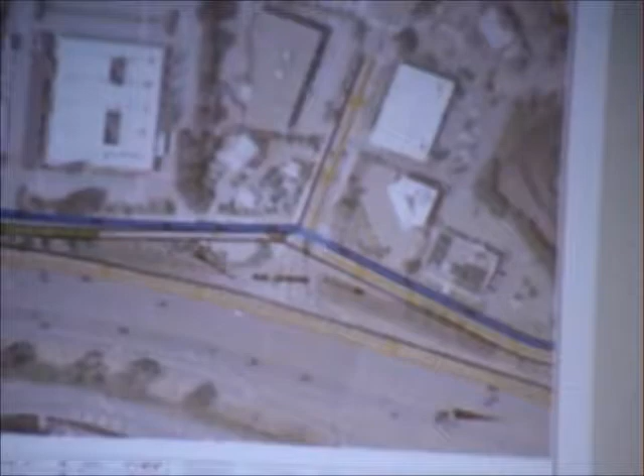I'm curious in a broad sense about the weaving aspect. Much has been made of that, and I do recall that the accident rate going south was less than north, south being more of the weaving frequency. So as a non-traffic engineer, I'm having some difficulty assessing the significance of this weaving feature, which is addressed in some fashion by many of the alternatives we're seeing. So in your assessment, how significant is this weaving? And Mr. Bracken made reference to San Rafael, and I have a little difficulty at times too, but there's a greater span there. So what is your assessment? Help me understand how I should assess this feature.

From what I understand, and I can bring my traffic engineers up, but with the weave it's all about the distance and the comfort for the driver to move from one lane to the other while the other driver is doing the same thing. So it's really about the distance. In this case, we have 3 weaves: from the on-ramp at Sir Francis Drake to the weave on a vertical-horizontal curve. When we come down, we have the existing weave—it's longer indeed, but it occurs between Sir Francis Drake on and Fifer off. Then we have the weave from the Fifer on and the Madera off, and then we have the existing weave from Madera to Tamalpais. So we've got a number of weaves in that southbound direction.

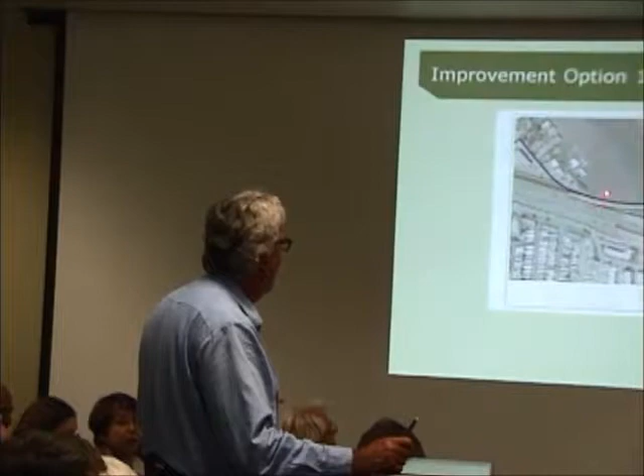Anyhow, that's what I see here as a problem when I drive it. That's a bottleneck and that's a bottleneck. Right, so this would help to mitigate that. So with that added lane, you're almost doubling the capacity to get onto that. Yes, I don't know if I'd say you're doubling it, but yes, you are increasing the capacity. And you're keeping vehicles moving at a constant speed rather than having to slow down to merge in, being forced to merge in without any distance to do that.

Okay, thank you. Okay, I have Katie and then Alice, and then we'll check in and see if it's time to wrap. And I'm sorry, Dave, I may have missed something. I really love yours because it's so simple and you just focused on direction. But I have a question, and Bill, maybe you can remind me.

In dealing with the southbound Sir Francis Drake and the southbound traffic weave merge, we've had different proposals doing different things in terms of where they have to weave or change lanes. For instance, the traffic coming from East Sir Francis Drake, getting onto the freeway, making that choice, and then for that traffic that wants to get over and get off on Lucky Fifer, is having to do its weave or crossover with Sir Francis Drake traffic or with the Ross Valley traffic on your bridge, correct?

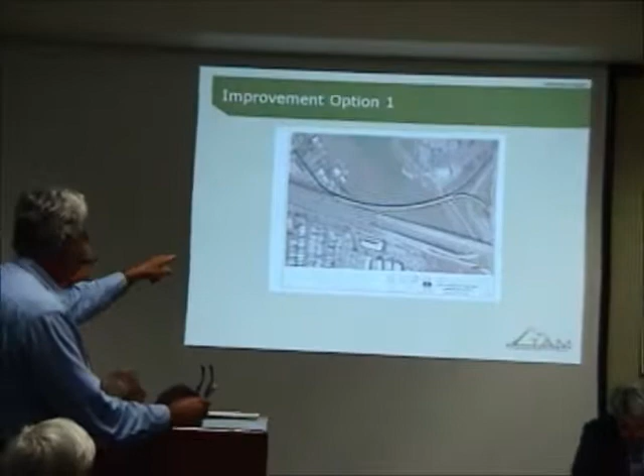Once people get to know that, you have two lane options when you're coming westbound from Sir Francis Drake. You have two lane options there.

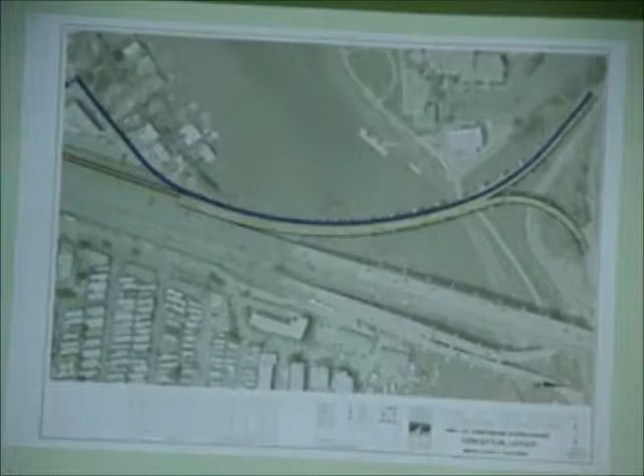Have any of the proposals we've looked at, or could this one be modified, to just allow the Ross Valley Sir Francis Drake traffic, Greenbrae to Larkspur, to stay local, and not give the option for southbound traffic from East Sir Francis Drake to get off at Fifer, forcing them to get off at Wornum instead? I ask that recognizing it's a commercial area, but I don't recall the volumes. I can't remember what the volume of traffic was. I'm wondering what's the volume of traffic actually trying to do that, how much of an inconvenience it is, and how much impact it would have on the businesses, because it would eliminate a huge problem.

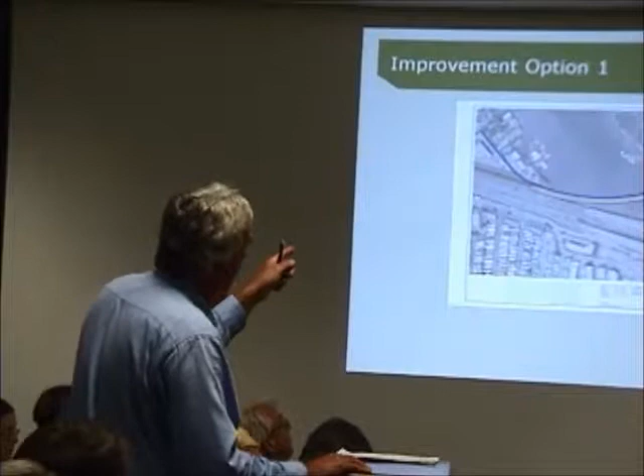It's a really good question. Bill can address the traffic volumes. That takes an origin and destination study that I'm not sure has been done in any kind of detail that would recognize that, peaks are... but it's a good point. As far as designing it, it's basically increasing the length of that black line you see to the left of the screen. You could certainly build it with this concept.

What kind of impacts would it have on the traffic, especially the westbound flow? That's a really good question. I ask it also because I think it's possibly an option, but also I'm looking at any of the merges that are moved farther up the on-ramp towards the west, towards Sir Francis Drake, having the potential to slow that down. It's a constriction point again, and I'm constantly looking at the Sir Francis Drake movement, both east and west, and how each of these proposals impacts that traffic flow.

And if you're not allowed—if you're taking your southbound 101 traffic and asking whether they want to go Lucky Fifer or Wornum—then they don't also have to cross the freeway there, coming off at Sir Francis Drake street.

Alice, you're last, so I have one comment and one question. When you're looking at what kind of safety concern weaving and merging is, you've already said it depends on the relative speed of the lanes from which the cars are making changes and the length of road over which they have to make it. Wouldn't traffic volume be a variable also?